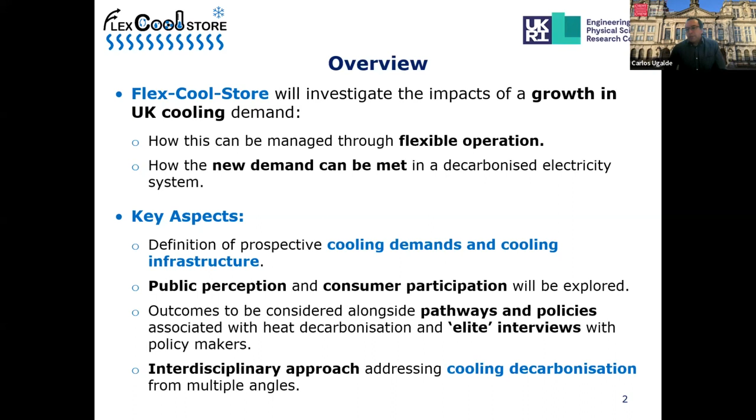Importantly for Mehri's group is that the outcomes will be considered alongside pathways and policies that are associated with heat decarbonization, so well alongside the talk earlier. And an analysis carried out using elite interviews with policymakers will be conducted. This is going to be linked to what's coming next. Now, this is clearly an interdisciplinary project, and the approach will enable the project to address the issue of cooling decarbonization from a variety of angles. And that will enable us to develop an even stronger relationship around buildings and decarbonization.

So what you can see in the slide right now are the specific objectives of the project as we presented them at the proposal stage. If I focus on the first one, the idea is to conduct detailed technical, socioeconomic, and policy studies. And this will enable us to understand how cooling demand might change over the next few decades.

For this, we will consider 4 main points. That is rising global temperature, within a UK context, of course, working from home habits, and this has been potentiated by what has been happening over the last couple of years with the COVID-19 pandemic, and increased well-insulated and retrofitted buildings, and potentially a green recovery leading to higher welfare.

With regards to the second point, we will aim to quantify the extent to which supply and cooling will affect peak electricity demand and the implications on network reinforcement. For these, we will get informed decisions from practical projects. Also, analysis as to how impacts of cooling demand will affect distribution and primary electrical substations will be carried out.

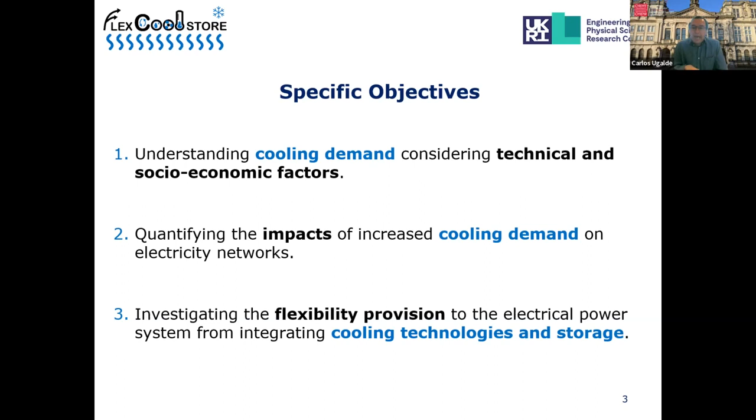The final objective is regarding the interactions and synergies between cooling and electricity systems and how this can be supported by electrical and thermal energy storage. Just a few facts and numbers from the project. We recently started, that was towards the end of September 2021. We have the research team in place. So nominally supported by the project, we have 4 researchers and 1 PhD student, but the research teams from the 3 universities are, of course, supporting us.

If I discuss the partners very quickly, so we have a strong force from Cardiff in terms of the techno-economic aspects. So we are leading the project. We have University of Bath and the Center for Climate Change and Social Transformations, who are conducting leading social science research into climate change action, and the Energy Policy Group focusing on governance that can constrain and enable sustainable energy systems. So Dr. Khosravi is from the group in Exeter, and you can see the list of academics and researchers in the project.

Just touching upon how we intend to deliver the project and how we are starting to deliver it, I would like to use this diagram because at the right-hand side, the top diagram, we show the 3 research strands and the 3 research teams through a color code in which we couple the social science elements with policy and techno-economic aspects. So red for techno-economic, led by CIREGS in Cardiff University, policy and governance led by Exeter in green, and public perception led by Bath.

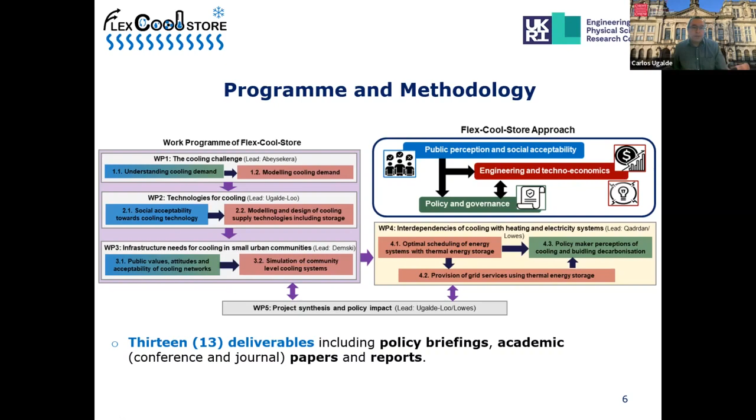I'm working on the flexibility, cooling, and storage project. As explained by Carlos in his last slide, this project consists of 5 work packages, which start with cooling demand and cooling challenges in the first work package. My presentation provides some literature review based on cooling demand.

Looking at cooling demand across the globe shows that 20% of total electricity consumption is used for providing space cooling, and this is going to be increased due to climate change and also the new style of working from home. This graph is provided by the European Environment Agency based on some historical climate data from 1950 to 2017. And based on this graph, heating degree days are decreasing and cooling degree days are increasing, which can be a kind of proof that the projection about temperature increasing is already happening.

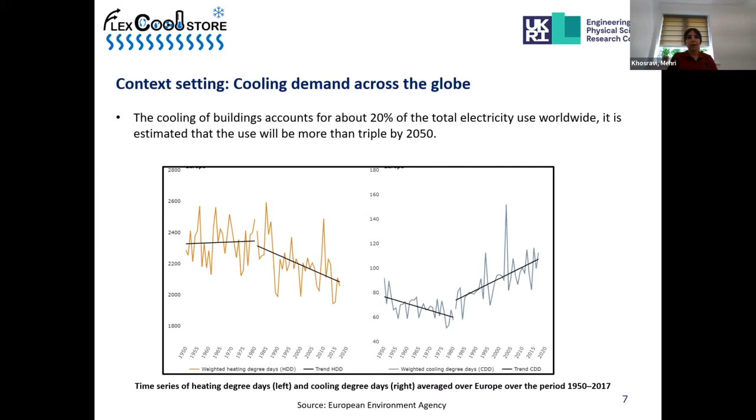And the next slide shows that this is happening in the UK as well. Although the current cooling demand in the UK is small, like 3% of total fuel consumption and 10% of electricity used, it's going to increase due to rising temperature. Looking at the UK climate data shows that we are kind of already feeling this global warming.

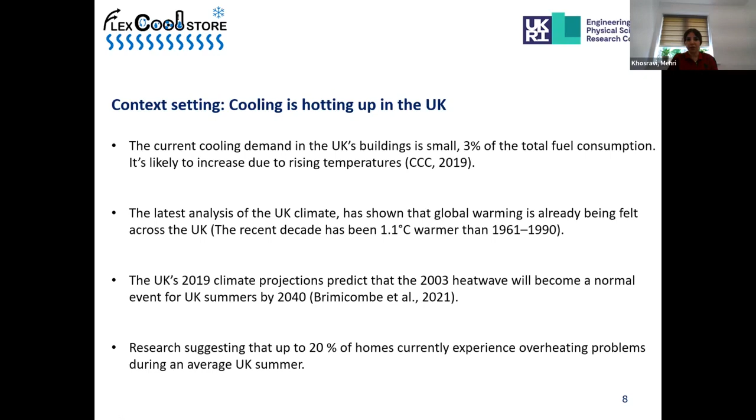If we compare the average temperature in the last decade with the current decade, and based on UK climate projections, apart from increasing average temperature, we will have a heat wave like what the UK experienced in 2003 as a normal event for UK summer before 2040. So due to increasing temperature, definitely we will have more houses that experience overheating problems during the summer.

And we have looked at the current cooling demand in the UK, which shows the current cooling demand is dominated by non-domestic buildings, and among these non-domestic buildings, the office sector has the largest cooling demand, like more than half of the energy used is consumed by this sector.

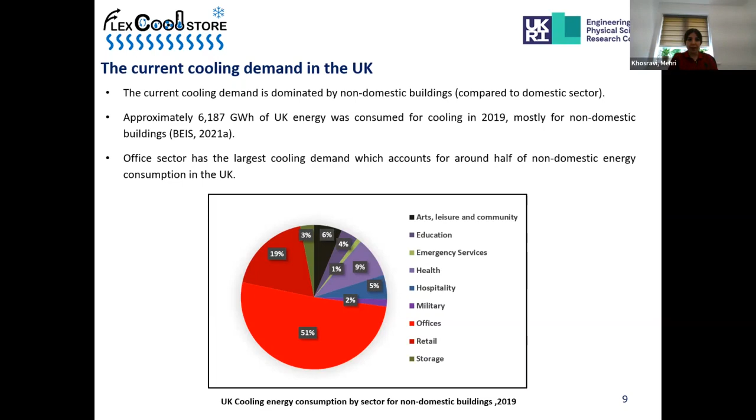And in the next slide, we have looked at active cooling technology. As you may know, we have two main approaches or strategies to deal with cooling demand. One is passive cooling strategy, which can be related to building code, insulation, shading, so that we can reduce the cooling demand. The other way is using active cooling technology and using tools to provide the space cooling.

The first graph shows the various different types of active cooling currently used in the UK, and based on the data, single split is the most preferred type of device in the UK. Nearly 80% of tools are single split, which is mostly used in offices. And the second graph shows the difference between these types of cooling devices used in domestic and non-domestic buildings. So nearly most of these cooling devices are used in non-domestic buildings.

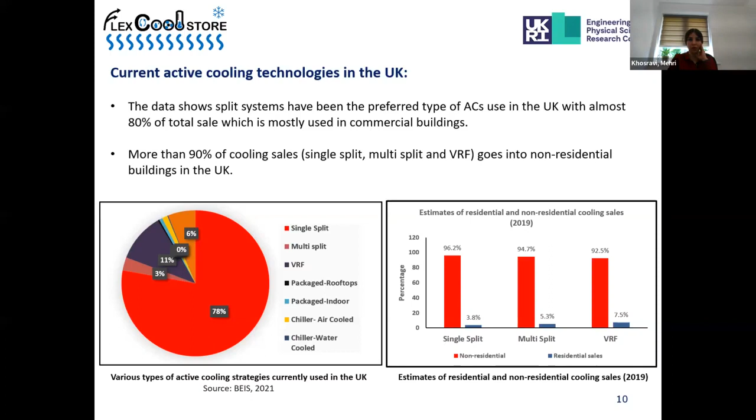But apart from these kinds of cooling technology, we have some efficient active cooling technology which is used in some countries, like district cooling systems, which are more efficient compared to individual devices like single split. District cooling is really common in hot climates like the Middle East, and even in cold climates like Nordic countries, and also in Western countries like Germany and France.

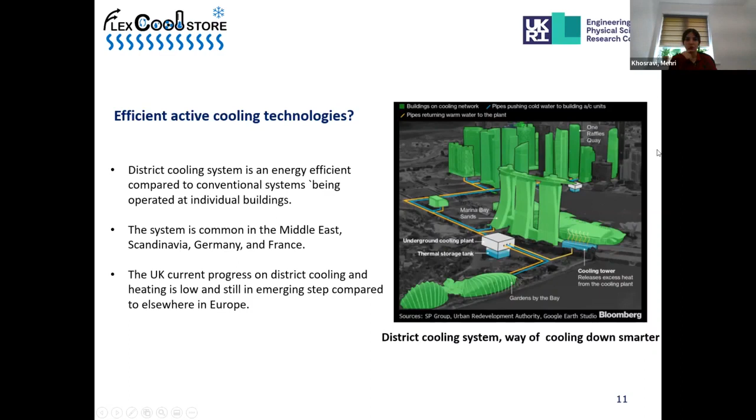But looking at the UK's current progress on district cooling shows we are still in the emerging step compared to Nordic countries or elsewhere in Europe. Reversible heat pumps are another type of efficient active cooling technology. The reversible heat pump can be used as a single system to provide heating and cooling from one device. And they are a very popular and dominant type of heat pump in the global market, including in Europe.

The first graph shows the percentage of heat pumps sold in 2018 in Europe based on different types of heat pump. And as you can see, reversible heat pumps are the dominant type, nearly 48% of the total sale. And the second graph shows the type of heat pump sales per country, and you can see the UK has the smallest part of heat pump sales, and most heat pumps in the UK are hydronic air to water heat pumps.

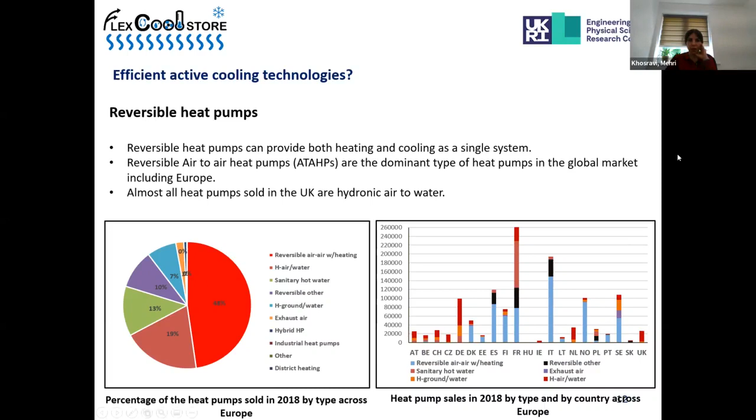The section we talked about was more about non-domestic buildings, but looking at the UK cooling demand related to domestic buildings, actually there's limited data on cooling demand from domestic buildings, and also there's limited understanding of how domestic buildings and households respond to extreme heat and cooling demand.

But National Grid estimated that uptake of air conditioners as an active cooling method will increase from 1 million to 18 million by 2050 to respond to overheating. And if this happens, we will have an unsustainable cooling approach like what we can see in this photo if we keep using air conditioners and don't move towards a more sustainable approach like district cooling.

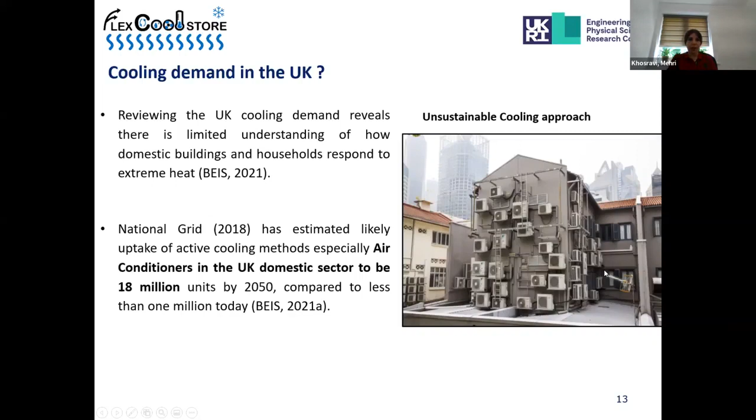And so in the next slide, now the question is to what extent this cooling demand has been considered in the UK energy policy. To respond to this question, we have done a kind of literature review. First, we adopted a conceptual framework to see what criteria we need to consider while looking at the literature. The framework Avoid-Shift-Improve is the framework that we have chosen to do our review.

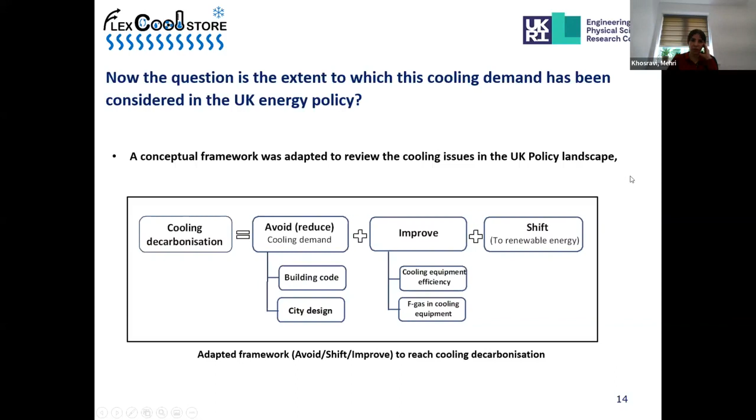It started with avoiding or reducing cooling demand, which is reducing energy demand, the basic and simplest pillar in any decarbonization program. So we started with this pillar, looking at building code, and then in parallel we need to look at improving the energy efficiency, which can be done through looking at cooling equipment efficiency, F-gas reduction in cooling demand, and the more important thing is we need to look at shifting from using unsustainable cooling equipment like air conditioners to more efficient devices or systems like district cooling. And then the last pillar is shifting to renewable energy rather than using fossil fuel.

In terms of avoiding the energy demand, the Committee on Climate Change has made some recommendations on using a passive strategy to reduce the risk of overheating by reviewing the building standards. And the Heat and Buildings Strategy, which was published by government 6 months ago, considered passive strategy to reduce overheating. But there has been some criticism of the strategy, because in terms of passive cooling strategy, the document has only considered new buildings, which means the strategy doesn't cover existing buildings. But as we know, most of the UK housing stock is existing buildings.

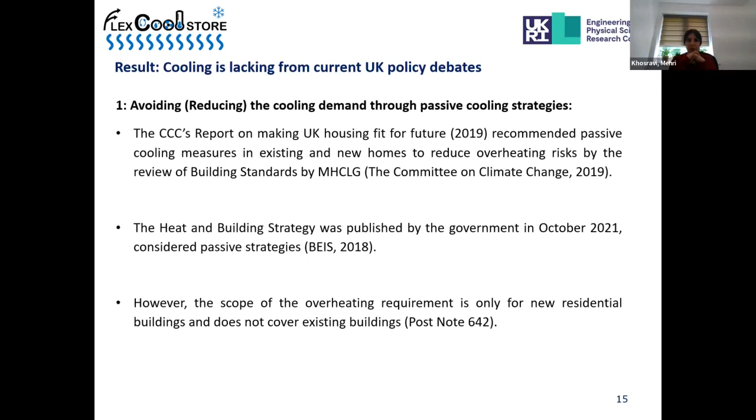In the next slide, we have reviewed the policy related to improving the energy efficiency of cooling equipment and F-gas reduction. Energy efficiency is generally regulated by eco-design and eco-labeling regulation, and the EU has some regulations for these two aspects which are retained in UK law. In terms of F-gas regulation, again, the EU has some regulation which came into force in the UK. Based on this EU regulation, European countries have to reduce nearly 80% of HFC use in equipment, including cooling equipment. And under the existing F-gas regulation, the UK has already reduced 40% of HFC consumption in all equipment,

but in reality, most AC devices and heat pumps rely on F-gas as a refrigerant because the existing ban doesn't cover AC devices or heat pumps. So again, there is some criticism of the existing bans, and there is hope that more bans will be included in the next F-gas regulation revision in the UK. But the most important aspect of improving efficiency relates to using more efficient equipment such as reversible heat pumps and also district cooling, which is very common in some countries that have a colder climate than the UK. These kinds of technologies are still absent in UK policy.

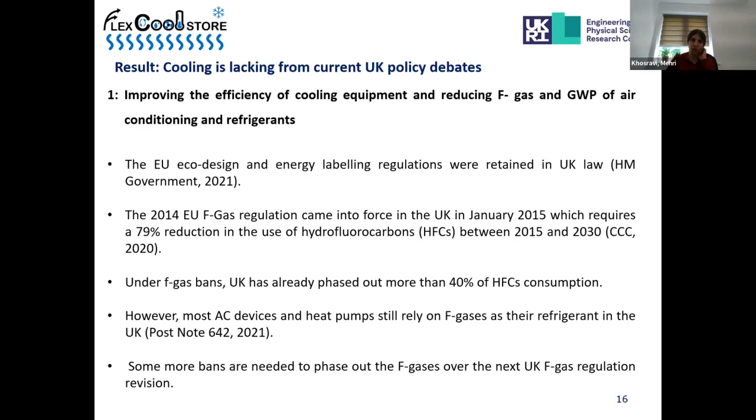The other aspect of this framework is about shifting cooling to renewables and thermal storage. Not only literature, but reality shows that countries with established expertise in district heating could pave the way for applying district cooling. We can see this technology in Nordic countries, which have established district cooling and have both district systems at the same time. In the UK, based on the Clean Growth Strategy, heat networks are projected to provide 17% of heat demand in homes and 24% of heat demand in industrial buildings. But progress shows that only 2% of building heat demand is provided through heat networks. And looking at this low speed, despite the focus of policy on heating solutions, we can say that the UK is far behind in shifting cooling to renewable energy or district cooling.

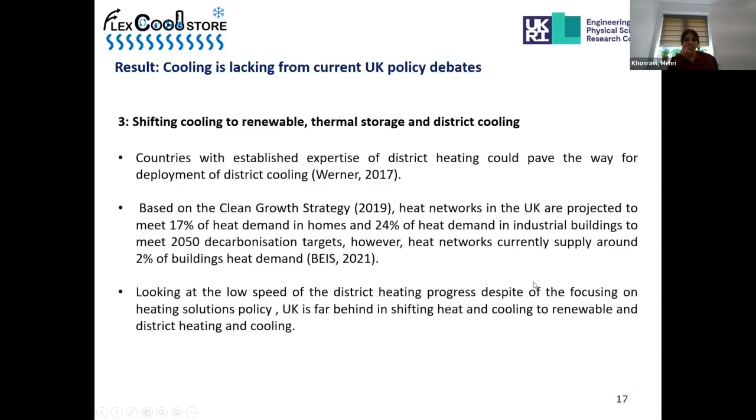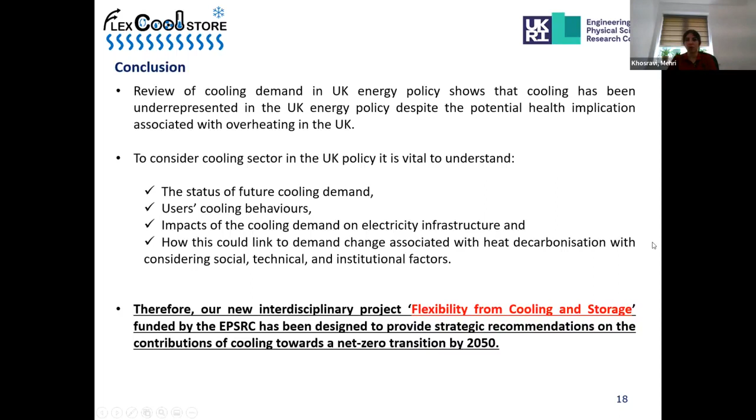So in conclusion, we can say that cooling has been underrepresented in UK energy policy, despite the risk of overheating in the UK, which has been considered in the climate risk document. And to consider the cooling sector in UK policy, it is important to understand the status of cooling demand, the current and future cooling demand, users' behavior, the impact of future cooling demand on the electricity grid, and how we can combine cooling decarbonization policy with heating, considering social, technical, and institutional factors. Based on this lack of research, our interdisciplinary project has been designed and funded by EPSRC to provide strategic recommendations and a contribution of the cooling aspect to the net zero transition. Thank you.